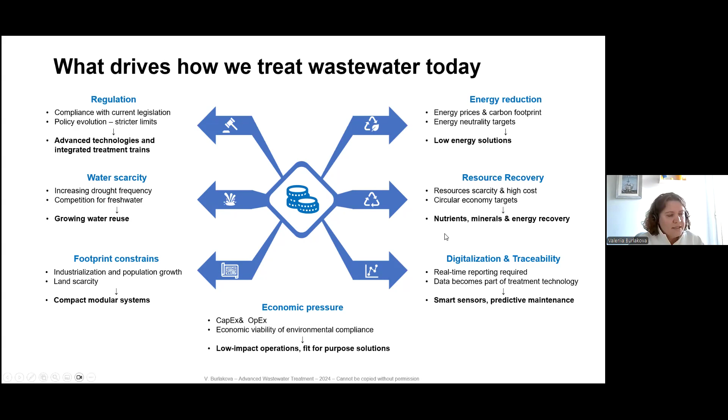The European Urban Wastewater Directive that regulates municipal wastewater discharge has been updated this year for the first time in 30 years. This new 2025 document keeps the same core parameters on organics and suspended solids, but it is introducing lower, stricter limits for nutrients, for phosphorus and nitrogen. And it is also adding first-time regulation on micropollutants.

Large plants over 150,000 people equivalent will need to add an additional treatment stage, achieving 80% removal of selected pharma and cosmetics ingredients from urban wastewater. And importantly, this stage will be financed by those pharma and cosmetics companies through additional taxes under the polluter pays principle. This directive also adds mandatory monitoring of microplastics, energy use, and greenhouse gases in urban wastewater.

And on the right side, you can see the compliance picture. Northern Europe is already in blue colors, so it's nearly 100% compliant with the old legislation. At the same time, Southern and Eastern European regions still lag, and non-compliance is expensive. For example, Spain pays around 12 million euros every 6 months in penalties until they completely modernize their wastewater treatment segment. So the pressure to upgrade municipal plants is very real.

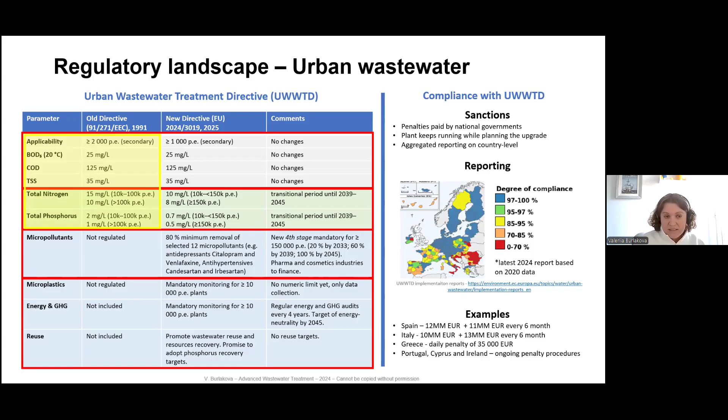And this pressure applies also to the industrial sector under the European Industrial Emissions Directive. This is a very complex document that covers nearly all industrial segments: chemicals, metals, food, energy, etc. Each segment has its own document defining pollutant limits and performance levels. This directive was also amended last year, and the new 2024 document goes even further.

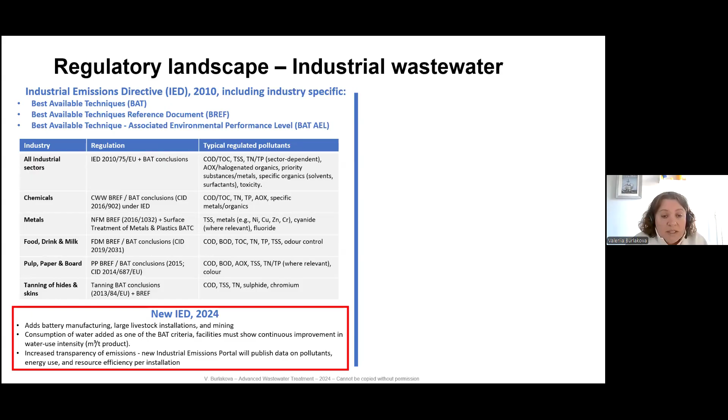It adds more industrial segments and for the first time includes water use efficiency as a performance criterion. So industrial plants must show continuous improvement, not only in discharge quality, but in total water use. And emissions data is publicly available through the European Industrial Emissions Portal, meaning transparency and reputational risks are now part of compliance. On this map, you can easily find each and every industrial plant in Europe and see how much wastewater, hazardous, non-hazardous, etc. they are discharging.

And here, unlike in the municipal sector, the industrial company will pay penalties itself, not the government. And these penalties can be severe, very expensive, and they can even lead to plant shutdowns and criminal liability of the plant personnel up to imprisonment. So for example, 3M Belgium, that you can see here on the graph, recently faced a temporary plant shutdown because of PFAS pollution and paid more than €500 million in penalties. Now let's see how this regulatory pressure translates into technology.

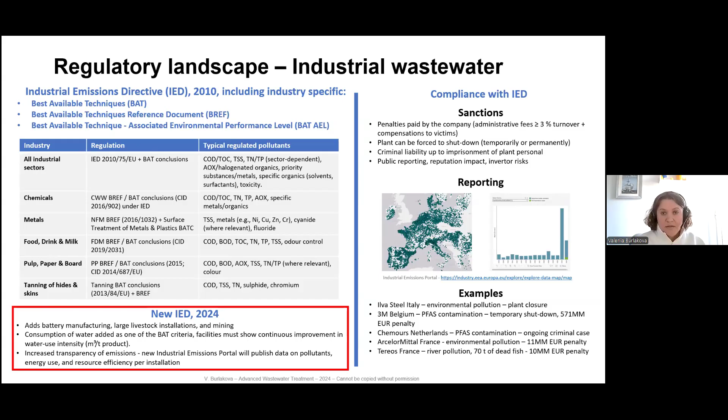So in urban wastewater, we see the classic treatment sequence. For the smallest plants, it is primary treatment for solids removal and secondary treatment for organic matter. Larger plants need to have tertiary treatment for nutrients removal, nitrogen and phosphorus. And finally, the largest plants will need to add a new quaternary stage for micropollutants removal within the next 10 years.

Today, the major focus is still on secondary and tertiary stage upgrades to increase the capacity of existing plants and ensure compliance with regulation for organics, nitrogen, phosphorus, so still even with old regulation, especially a big trend in Southern and Eastern Europe, which is still not compliant.

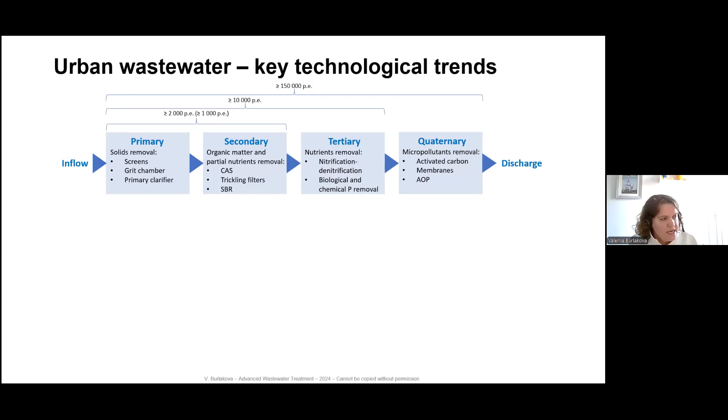And rarely now you can see plants who will do this upgrade through conventional activated sludge. They use more and more a new generation of biological systems. And here I want to talk about 4 of them, which are the most popular today. MBBR, a very quick retrofit option where you're adding special plastic carriers to intensify biofilm growth. It has low capital cost, but high operational cost because of high energy consumption. And it also has a risk of microplastics generation because of attrition of these plastic particles.

MBR, very interesting technology, combines biology with membrane filtration. It delivers excellent effluent quality, but also has high energy consumption, and membranes need to be replaced every 5 to 7 years. More novel technologies, MABR. In simple words, this is an advanced aeration system. It's consuming up to 70% less energy than traditional technologies. It's very compact. You can upgrade your plant very quickly, and it's very good, especially for decentralized plants.

And finally, granular sludge, also a very compact, very energy efficient solution. The only drawback, it's a bit sensitive to different process shocks because they can damage the granulation process. But now all 4 of them are well recognized globally, and more projects every year are happening with these technologies. Each of these 4 options represents a balance between energy, cost, and footprint. And at the end, it's up to the plant to decide which technology to use, depending on their needs.

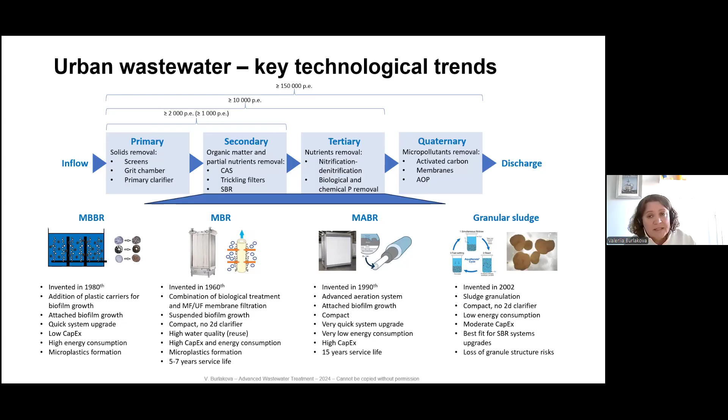Now, on another side, let's talk about waste sludge. Each and every stage of biological treatment generates it. First, it should be dewatered and dried. In the past, and still today, it is frequently used as fertilizer at the end because it's rich in nutrients, nitrogen and phosphorus. More and more countries, because waste sludge also has a lot of toxic materials, heavy metals, PFAS, and microplastics, that's why some countries now demand incineration of the sludge. And this is a costly and energy-intensive process.

That's why it is beneficial to integrate a so-called anaerobic digestion stage prior to incineration. You will treat your waste sludge in special anaerobic methane tanks to produce biogas. And this biogas then can be purified through conventional or membrane methods to high purity biomethane. And this biomethane can be used internally in the plant, and many plants already became energy self-sufficient with this approach, or some spare volume can even be sold back to the grid, generating additional income for the company. Many great installations you can already find in Europe, but also in Ukraine.

And finally, phosphorus. Europe imports 80% of its phosphorus. At the same time, urban wastewater is full of it. You can recover phosphorus from the sludge water after sludge dewatering and drying, mostly in the form of struvite. It's an easy to deploy process, but it has quite low recovery rates, 20 to 40%. Or you can recover phosphorus from sludge ashes after incineration with more complex and more expensive technologies like acid extraction or thermochemical treatment, but at the same time, you have a very high recovery rate of phosphorus.

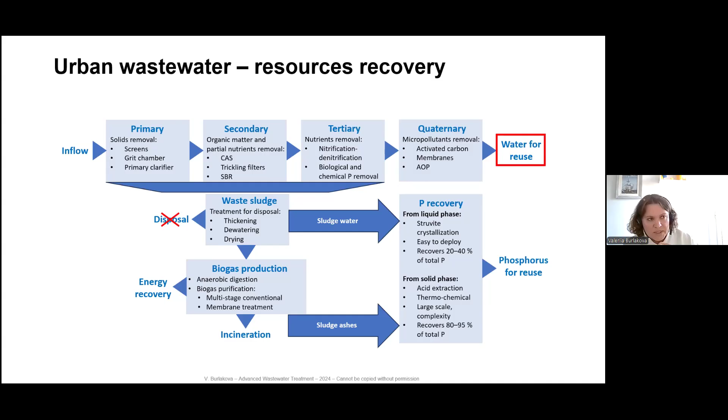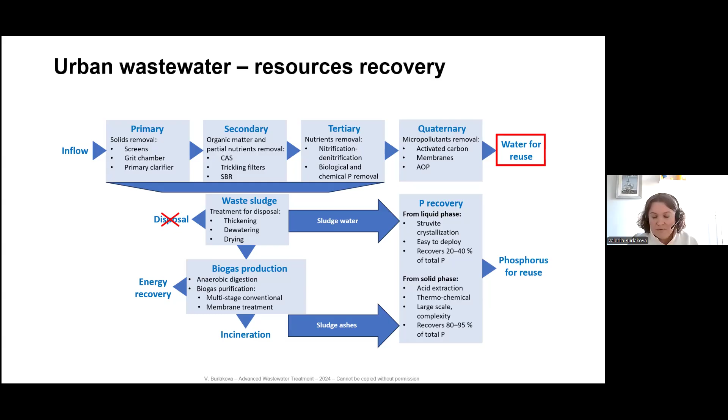Traditionally, wastewater treatment plants need to clean their water to good enough quality for safe discharge. But because of water scarcity and increasing treatment requirements, this water will be simply too good for discharge. At the same time, reuse cannot be achieved by adding one simple single technology on top of it. It should have a fit-for-purpose strategy. So let's talk about a few options here.

The simplest, the cheapest way, and already the most popular one today, is to treat urban wastewater after biological treatment with sand filtration, ultrafiltration, or MBR modules, plus disinfection, and you can safely reuse this water for irrigation in agriculture. It's already mainstream in Southern Europe. So all the oranges, lemons, etc., that are coming from Spain, they're all irrigated with purified wastewater.

Industrial reuse is another, I would say, the fastest growing application. Both urban and industrial wastewater can be treated with different combinations of MBR, ultrafiltration, reverse osmosis, ion exchange resins, or EDI modules to achieve the quality needed for any possible industrial process. So you can start with the cheapest, simplest option to clean water for the cooling tower feed. This is actually the largest application in the industrial segment. Or you can treat the water to the high purity quality required to feed high pressure boilers.

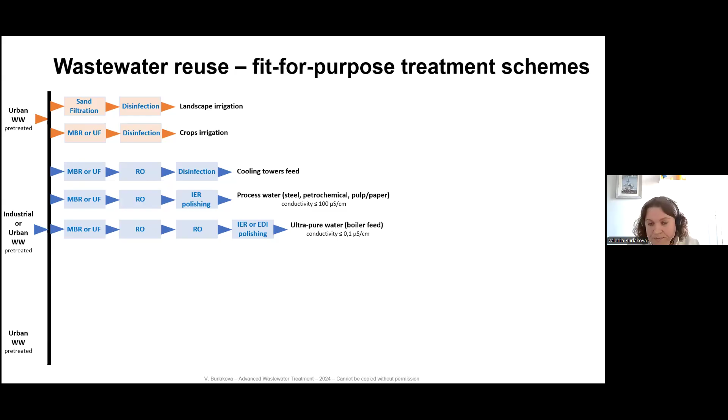Advanced users in the industrial segment can also go up to minimum or zero liquid discharge. They additionally use special high-pressure so-called brine reverse osmosis, evaporators, and crystallizers, and they can achieve up to 100% recovery of the wastewater. And finally, potable reuse.

Urban wastewater can be treated successfully up to drinking water quality. And then, in case of direct potable reuse, it will be sent directly to the population. Or in case of indirect potable reuse, you will have a natural buffer in between in the process. I know it sounds not very tasty, but it is already proven to be safe and applied in different regions around the globe, in California, in Singapore, and even in Europe, in France and in Belgium. Belgium recently started its first direct potable reuse project.

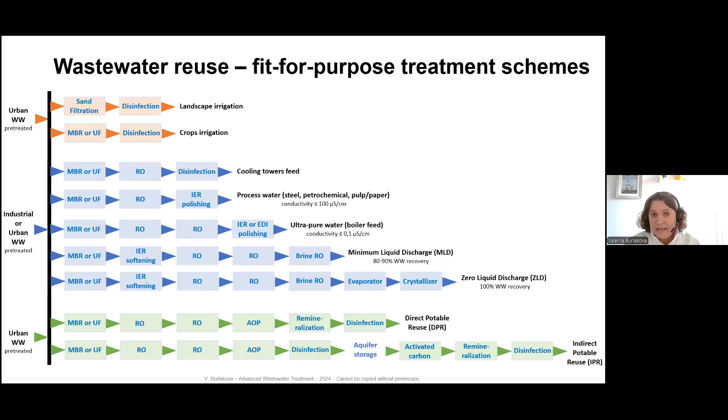At the same time, looking at all these complex schemes, the question is, can we afford it financially? And the answer is yes. Reuse today is economically competitive. I'm sharing here information about capital expenditures and operational expenditures. So irrigation or basic industrial reuse already has similar cost to natural freshwater treatment. So we will better protect this natural water for drinking water purposes, even if there is still no water scarcity. The cost of even the most complex reuse schemes is already below seawater desalination.

Actually, desal is economically beneficial only for the largest, so-called mega desal plants that they are building in the Middle East, etc. Those plants are treating 500,000 to 1 million cubic meters per day. We simply don't need them everywhere. So if the need for water is lower than that, and there is water scarcity, it will always be economically beneficial and environmentally more friendly to go to some of the reuse schemes.

Only ZLD, zero liquid discharge, is still more expensive because of the very high energy demand needed for evaporators and crystallizers. But ZLD is never used because of water scarcity. ZLD is used only if it's demanded by legislation in cases of severe environmental pollution from previous bad industrial practices. Most of these projects are happening in India and in China. So today, looking at this picture, economics is no longer the barrier. It's actually the enabler of wastewater reuse. And the question is no longer, can we reuse wastewater? It should be, why wouldn't we?

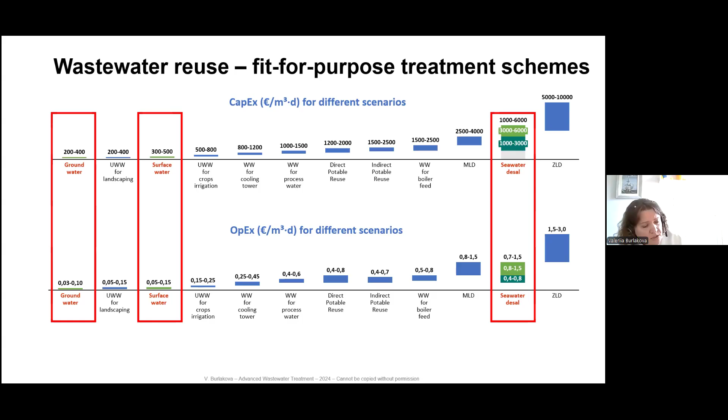And all these trends lead to one important conclusion. Wastewater reuse is no longer optional. We are facing chronic water stress. New regulation also expects reuse to happen. It is also financially viable, often cheaper than desalination. And finally, we must change how we see water. It is not a liability or waste, but a valuable raw material.